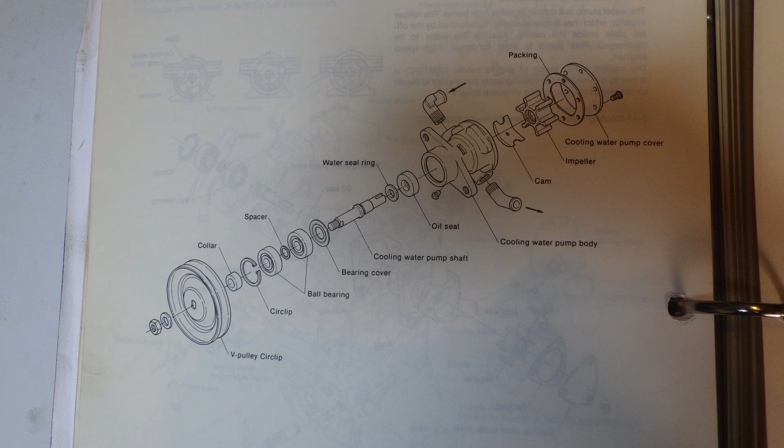Hi and welcome. I'm going to give my raw water pump a quick servicing. I'm doing this because it started leaking in the boat. First thing you need to do is gain some kind of access to your engine. This is my water pump down here, driven from a little fan belt.

Normally if I put my hand underneath it's wet, but at the moment because I haven't used it, it's got salt on it. These two adjuster plate nuts, the lower one and the top one, are what I take off to slide the whole pump and the plate off. This intake hose will have to go, and around the back there's an output hose which will have to go as well, but they can wait for the pump to be removed.

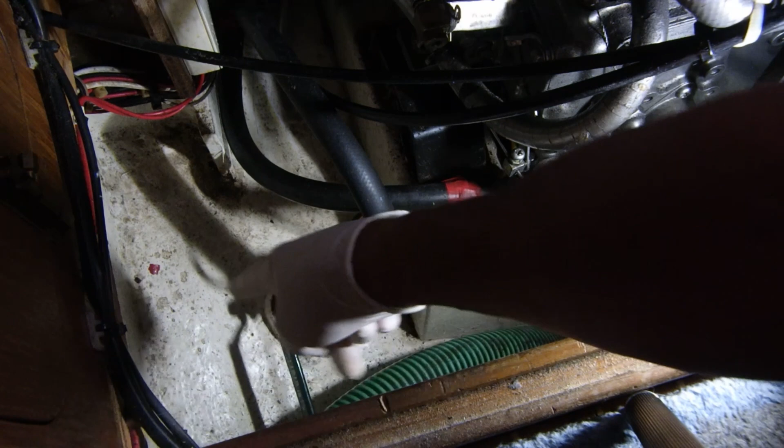If all goes well, a 12mm combination spanner and a flat screwdriver will do the trick. First of all, make sure this seacock's switched off. The handle has to go across the flow, not with the flow. Then get your 12mm spanner and break your two adjuster plate nuts. You're pushing down on these anti-clockwise, standard setup.

It's worthwhile noting these things are quite long. They're about 5 inches, I think, if I can remember. And what you'll find is that you need a bit of area in front of them to be able to withdraw them out. If you haven't got that sort of area, you'll have to take the small 2 bolts off which hold the pump to the adjuster plate instead. You can see the whole pump's loose now.

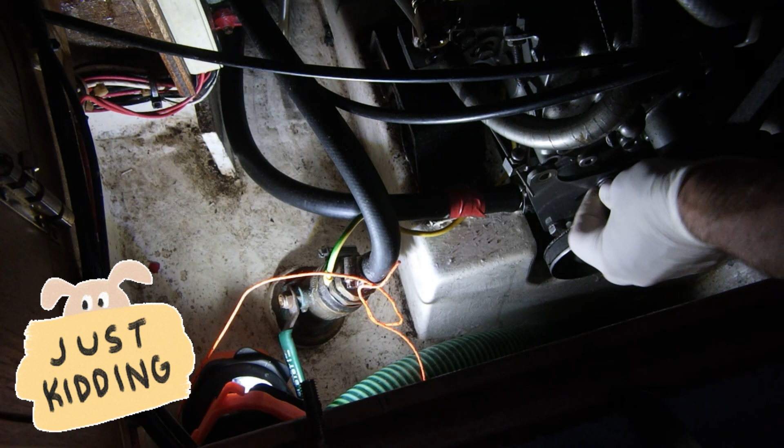When you remove the second one, don't worry. Pump's not going anywhere. It's not going to disappear down the bilge or anything. It's still got 2 hoses on it. Second bolt, just as long as the first. So when you get them out, the only thing more or less holding it in place is the fan belt.

Loop it off the fan belt and the only restriction will be the hoses that were on each end of it. This is the position you'd need to get it to now in order to do just an impeller while en route. The back plate's held on with 4 bolts on this one because it's a speed seal, 1, 2, 3, 4. Next we need to remove the jubilees, this one on the supply and the other one on the output.

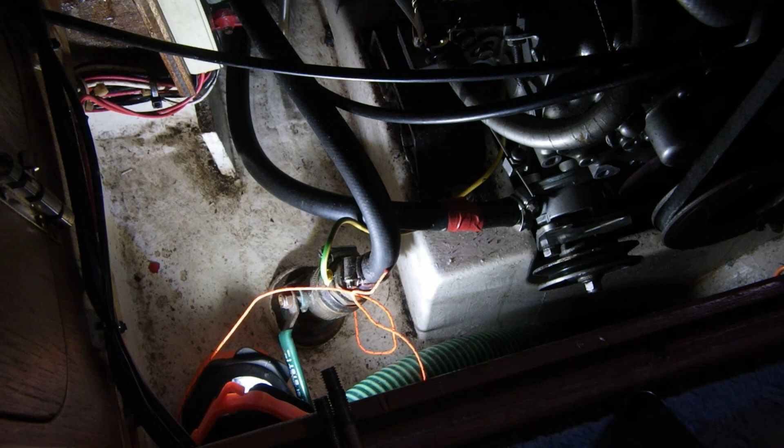I can't access the screw because the adjustment plate's in the way, so I can't get the screwdriver in line. So I'll introduce a 7mm combination spanner, and that can work on the hex and it doesn't need to be in line. It's a bit slower than using a screwdriver on a Jubilee clip, but you can get small ratchet versions of this as well. A little bit of rapid spanner movement.

I've loosened the clip now enough to be able to rotate it a little bit, so that I can hopefully get the screwdriver on it and finish undoing it. Once I get it sufficiently loose, all I'm going to do is slide it down the pipe out the way, so hopefully it doesn't end up on the floor. Down the bilge.

Once I move the clip out the way, I'm going to get a firm grip in one hand of the pump, and a firm grip of the hose in the other hand. And I'm going to try and rotate them, not pull the pipe, but rotate the pipe until I feel it moving. And once I can feel it moving, then I know I can ease it off and let the water drain out the system.

A little tip here, if you feel the pipe tear underneath your hand while you're rotating it, it's the strengthening cords inside the pipe that are breaking, and you really should replace that then. Just let the system drain out into the bilge, there won't be much in it. Now do exactly the same again with the output hose.

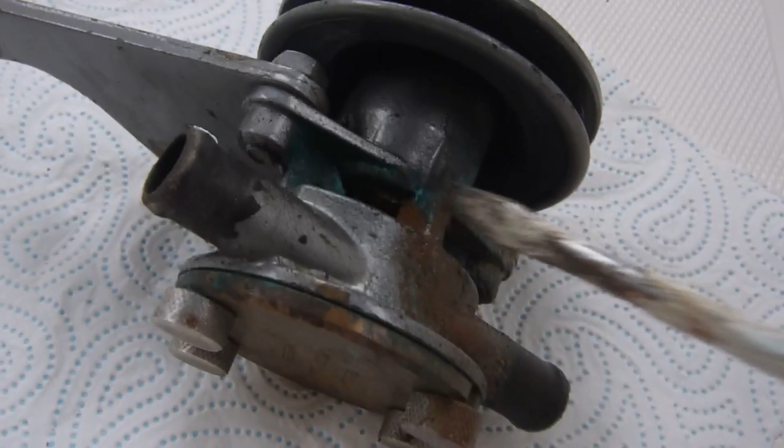Well, I've ended up needing a 12mm, a 7mm and a flat screwdriver up to now. But at least that'll let you get it off the boat and take it home. Now this is the bottom of the pump here. And you can see the tide mark, or the telltale tide mark, where the actual rusty water's been running down the pump. And if you look very closely just in this area here, you can see that rusty line there where the water's been leaking out the pump.

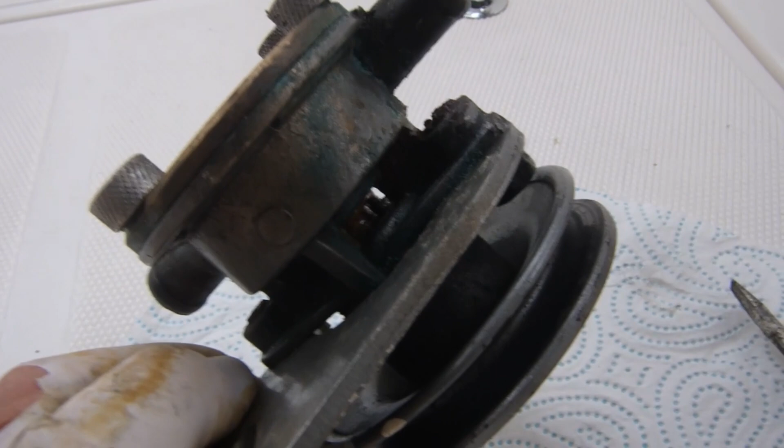Most pumps try and make sure there's a void between the bearings and the impeller, so to protect the bearings. Well, I take the whole thing back to the workshop. You can clearly see where it's been leaking. Time to make a bit of an examination, I think. Right, well, the obvious things are, this is the pulley bearing end, and the other end is the impeller housing end, this end. And you can clearly see the leak's been coming from the void area between.

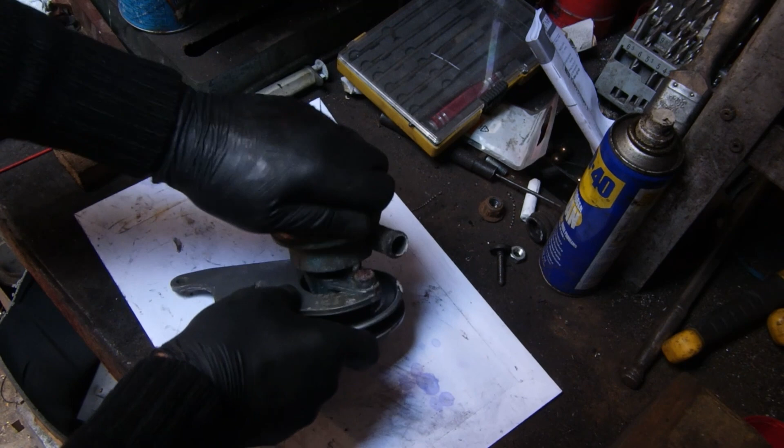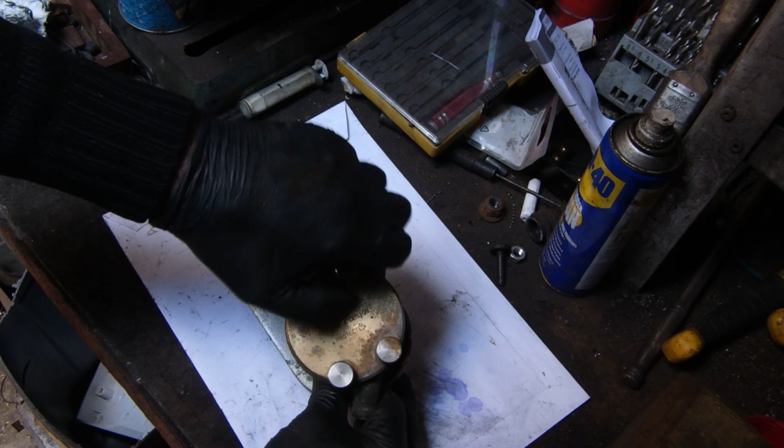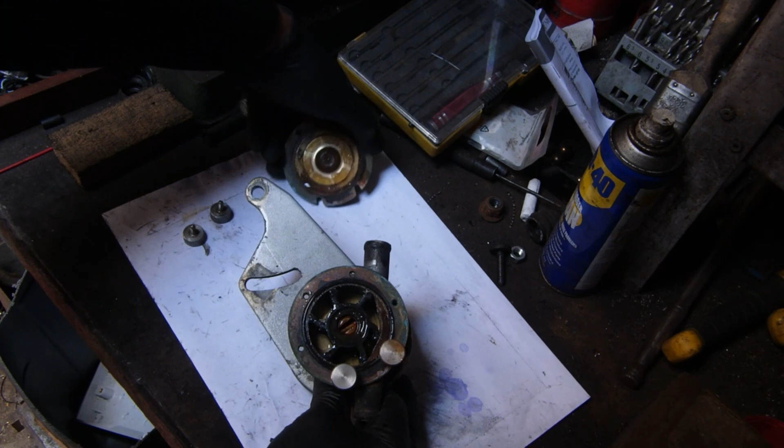These plates normally have 6 screws to undo with a screwdriver, but as you can see on this plate there's just 4 knurled nuts. This is known as a speed seal. You undo 2 of them and take them right out like that. Once you've removed them, the other 2 only need slightly loosening and the plate will slide off like this. This is a bushed plate and has a bush in the centre of it, so be careful not to drop the bush into the bilge if removing while still on the boat.

This piece that runs around the side that looks like a lump is the cam plate. That's the bit that makes the impeller squash so it sucks and pushes water. Now, using a spiked screwdriver with a 90-degree bend on the back of it, you put it to the bottom and you lever up underneath the impeller to bring it out. There are other ways of bringing them out. This is by far the best tool you can use to remove an impeller, and it's also the best tool you can use to remove the seal out of the pump as well.

Should you not have one of these tools, well, there's another method you can use using 2 screwdrivers, one either side, but you're actually putting a little bit of pressure on the working face at the front, so you have to be careful. Have a quick look at the tool I use with the 90-degree bend in it. It's excellent. The method that uses the 2 screwdrivers is quite simple. One goes in one side, one goes the other, and you draw it up together like that until it comes out.

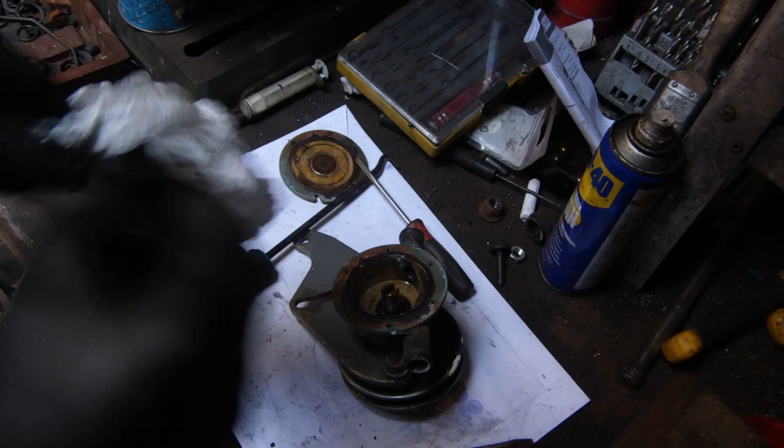I'm just going to have a quick look at the impeller, see if I can see any visual damage on it, like cracks along the vanes, so the vanes could actually detach and come off. Check that the drive bush inside hasn't delaminated. The pump housing around here might have a gasket or an O-ring seal which needs to be checked as well. Most paper gaskets around here will already have ripped at this point and will need replacing.

The advantages of an O-ring are you might get a number of goes out of it. It doesn't really need replacing until it's gone hard. Although for the cost of an O-ring, I'm quite sure you should replace it every single time. My method of fishing an O-ring out is just to get a pair of tweezers and push it a little one way or the other, and it makes a little bump, and I put my fingernail in the bump and I lift it out. That way you've got no chance of scoring or damaging the recess it came out of.

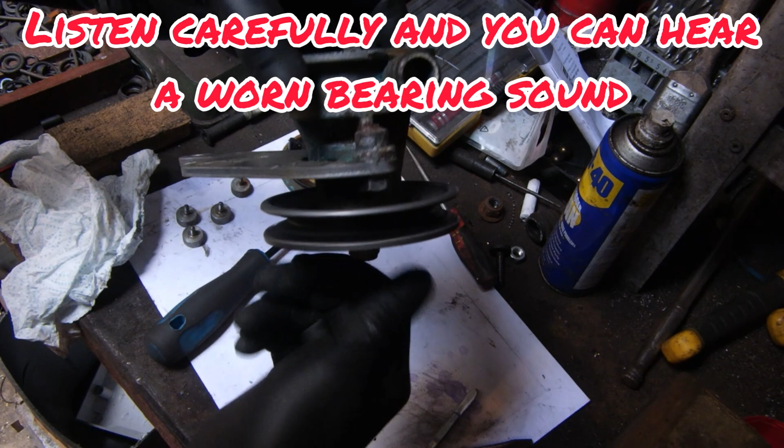This black thing down here is the seal that's meant to keep the water in the wet side of the pump, which has obviously failed because the water's been coming out here. Now I want to check for play, and I'm going to rock the wheel this way, and I can't feel anything, although there was a bearing noise, so I'll turn it 90 degrees and I'll retry the same, rocking it, and then after I've rocked it I'll try pulling and pushing to see if the shaft moves in or out. And it doesn't, it all feels lovely, but there's definitely a funny noise in there somewhere.

If you look inside the pump here, you can see something there. It's a little rubber O-ring. This little O-ring has a really technical job to do. When this shaft spins round, the little O-ring, if it gets a drip on it, uses centrifugal force and flings it out the pump. Ideally, it should be located in the centre of this gap rather than to the side.

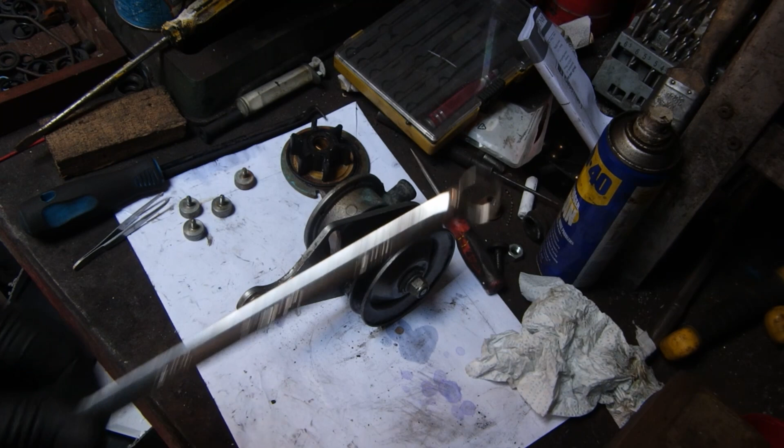The nut that holds the pulley on sort of slips in your hand if you try and use hand force holding the pulley. So what I do is I get a screwdriver and I hold the pulley still and I give the spanner a whack. And it normally frees the nut the first whack or the second whack. There you go, it's gone.

If you don't have a breakdown of all the bits and pieces, put them in an order when you take them off, like nut, and then washer, and then pulley, and then washer, and so on. You're now left with a bearing retaining nut and a circlip to deal with. The circlip that holds the bearings in place has got two little eyes in it. The two little eyes are one there and you squeeze them together with the grips to loosen the clip.

On the other side we've still got our offending item, the seal, and I'll show you how to get him out dead easy with my funny screwdriver. You stick him in the hole there and you just rotate it 90 degrees and you go round the pump giving it a little twist in each hole, and it pushes up on one side of the pump and the other side it shoves against the seal until all of a sudden the thing just pops up on the other side. So you can see the seal itself there.

You can even get a grip on it on this side once it's up sufficiently. Work it a little bit and it'll soon be clear enough for you to get hold of with your fingers, and then just pull it out. If it's a really old seal, the rubber will have dried and hardened and maybe even cracked. If you just push the inside with the screwdriver, it'll show you if it's still flexible or not. Well, this one's still flexible.

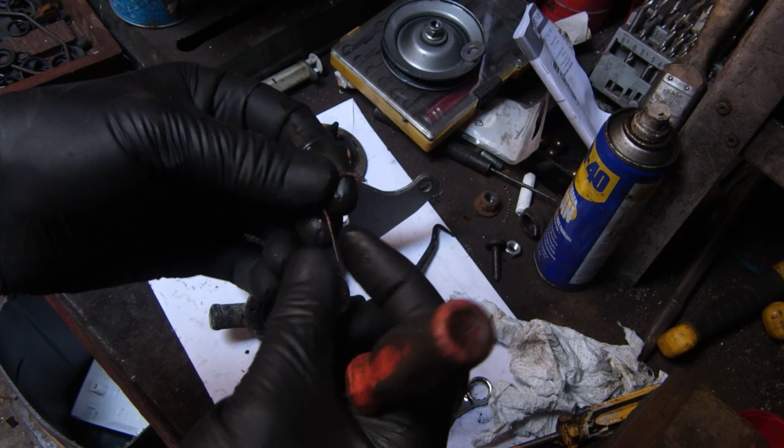Just under the lip there, there's a spring. The spring keeps the tension on the seal itself. It's easy enough to get the spring out. If you're careful, you can see if it were broken or not. Well, this one's not broken, but it's very rusty and it's lost its spring, and that doesn't help things. If I just give it a gentle tug, look for the weak link. I'm sure there's going to be one. There it is. It'll just fall apart on a rusty section, and there's no strength or spring in it. As you pull it, it just stays pulled or snaps.

Well, to be honest, although it looks worn, it doesn't look like the worst seal I've ever seen. So I'll just clean it up, check the numbers on it, and then give it a measure. You can use the numbers on it to order another one if you haven't already done so beforehand by using the model of your engine and your pump.

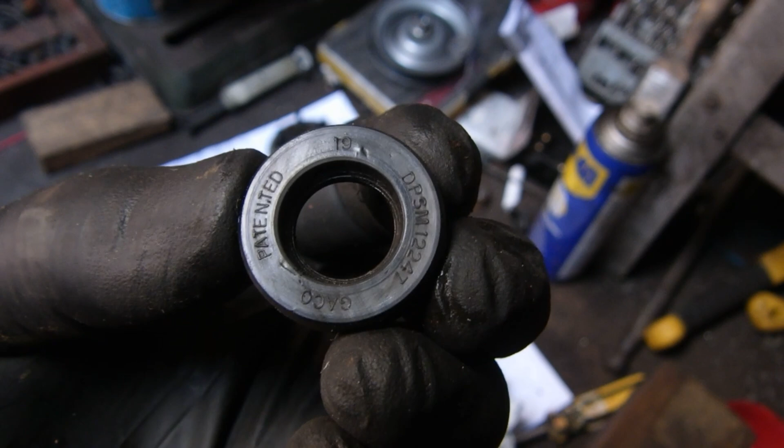There's quite a bit of a salty, rusty mess in the back of mine, so I'm just going to clean out the back bit. You can wash it out with a bit of spray or something like that. In this area here, the void, mine's got chunky, crusty, rusty bits in. And then I think I'll dig out that O-ring that's hiding in there. The O-ring, don't forget, is the little bit that chucks the water away when the pump's spinning round so that it doesn't run down to the bearing.

Here's the O-ring. Nothing special, just a circle of rubber. The O-ring's real job is to buy you time once the seal's failed, so it doesn't get the bearings straight away, so that you've got a little bit of time to notice. This little devil looks after you and gives you quite a few extra hours. Very mucky in there. I'm surprised this pump still goes round.

Next we need to remove the circlip. Put the pliers in the two little eyes, squeeze together, and with your fingers keeping hold of it, lift it off. Then put it with your other bits nice.

Right, we need to take the bearing retaining nut off next, so you'll need a big spanner for that, a 19-ish on a ring, and you need an open ender to stick on the shaft itself to lock the shaft, so you can take the nut off. Now this is special, this. What looks weird in what I'm doing now?

Give yourself a pat on the back if you spotted what was weird about that. Well, it was quite simply weird because it's a left-hand thread. That means it goes the opposite way than an ordinary nut. And if you look on it, that up the top there is telling you left-hand thread.

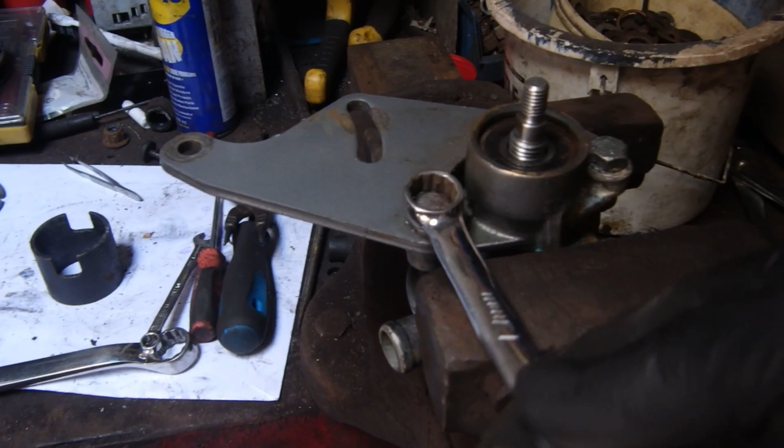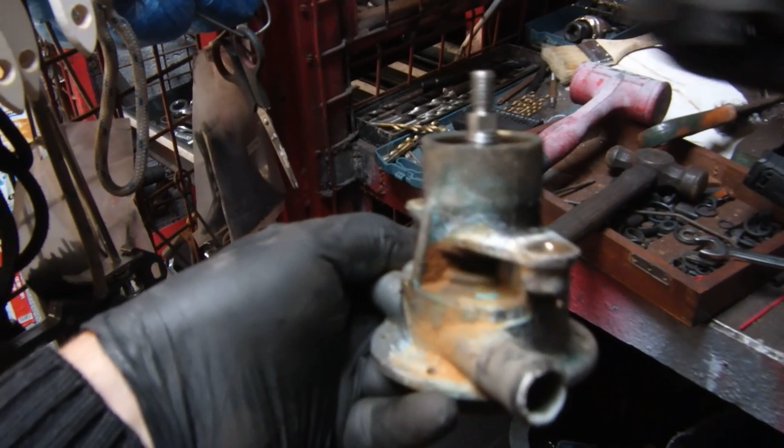Next, I normally take off the mounting plate. It just makes the pump easier to handle, and it's a doddle to take off, just two quick nuts. Some of you might have even left the mounting plate on the engine. In order to push the shaft out correctly, you should put the load down to the working flange, but you need special tools to do things like this, and we don't all have them. So there are other ways of doing it.

You could A, make one, or B, go to the toolbox and find yourself a suitable socket, and the socket itself can sit on the face ring. Bit dangerous for your face ring, but it can sit there anyway and you can push into that. Any good fitting tube that goes along the bottom there and the bearing can slip into it will do fine though. Once you've found a suitable socket that the bearing will slip into, take it then to the press.

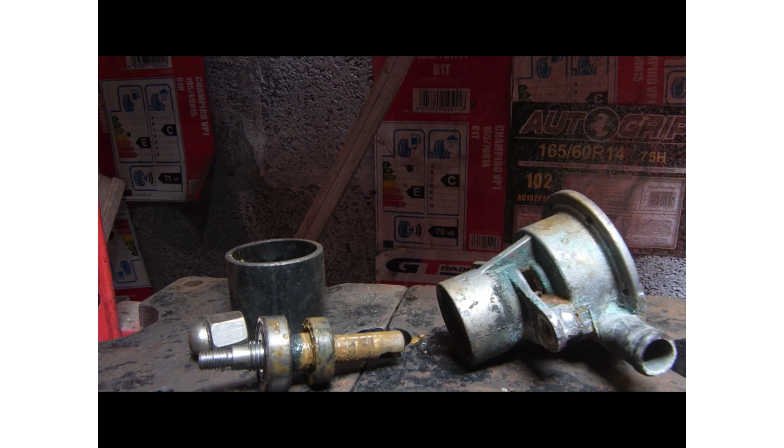Put it on the press and you're going to shove it out into the socket. The press will end up pushing it down about 15 millimeters before it drops into the socket. And as soon as it drops into the socket, stop pushing. If you feel any pressure doing this, stop, but otherwise, there she goes. Well, it doesn't look very nice in there. Bit of a rusty looking shaft, so I'll pull the bearings off and see what we've got.

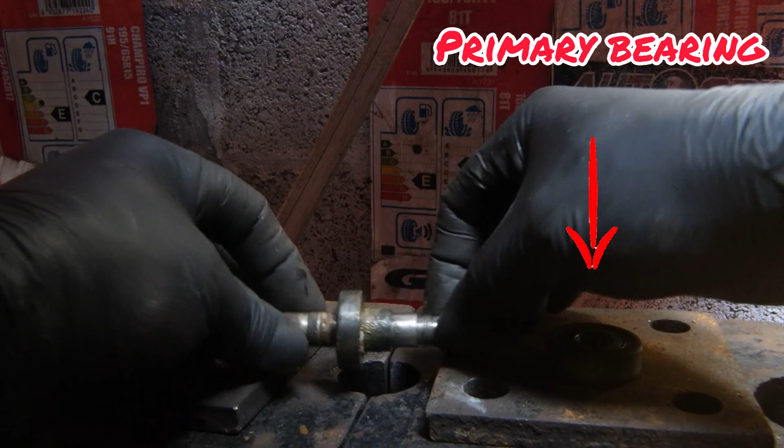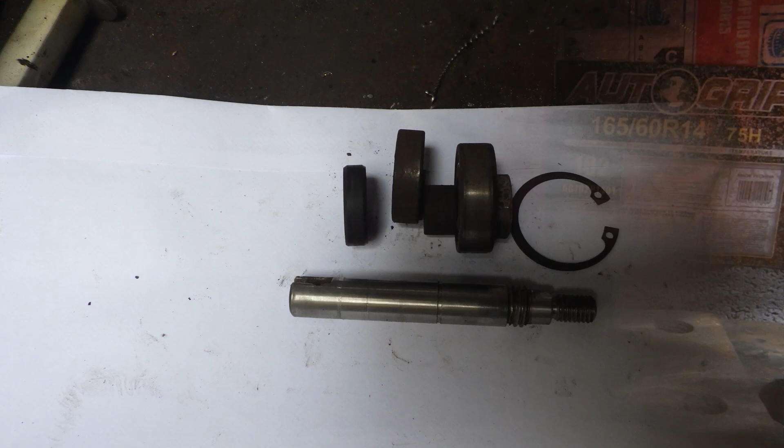After removing the primary bearing off the shaft, we're left with the shaft with the small bearing on it, followed by a little circlip, and then the sleeve which is on top, which is a spacer, which controls the distance that the primary bearing can slide down the shaft. This is the order the bits come off: seal, small bearing, circlip, spacer, big bearing, nut, big circlip. There they are spread out. The shaft wasn't that clean. I've given it a clean with some 1200 wet and dry.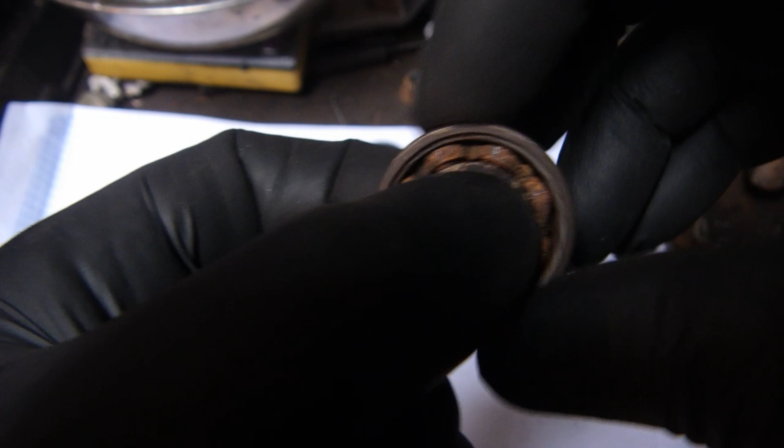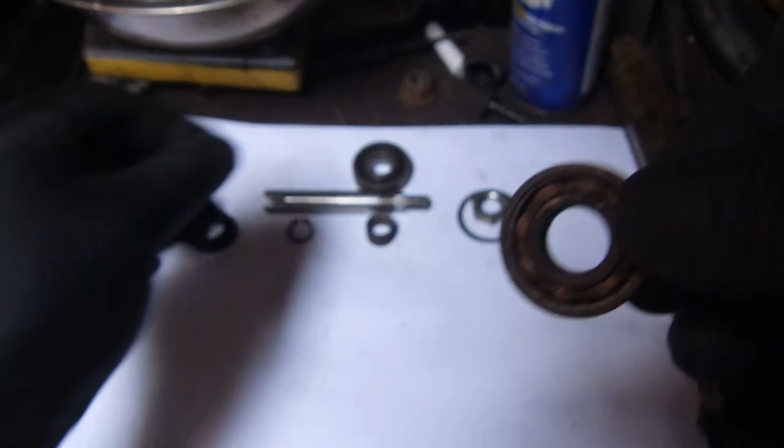This is the state of my little bearing. I've pulled the rubber side off it with a little screwdriver and found that the actual bearings are seized to the inner bearing race. The outside one will move, but there's a millimetre or so of play in it. So it's probably been floating around and missing it most of the time. When I poke the shaft in on the end of the bearing, I can see the inside movement, and it's quite considerable. And I think this has been the responsible item for the seal being under load and allowing water to get out. What a mess.

Alright, let's have a quick look what this O-ring does. All it does, it just gets shoved down on the shaft, and it's got no particular place. It's where you're going to leave it, it's going to stay. But when it's working and it's spinning round, there's these little plastic tangs that stick out here and here and here. And what they do is when there's a drip on the O-ring, the drip touches one of them and it flicks out the side.

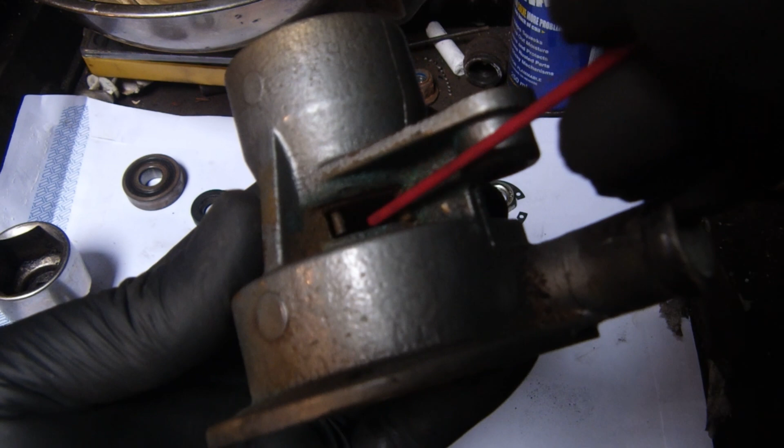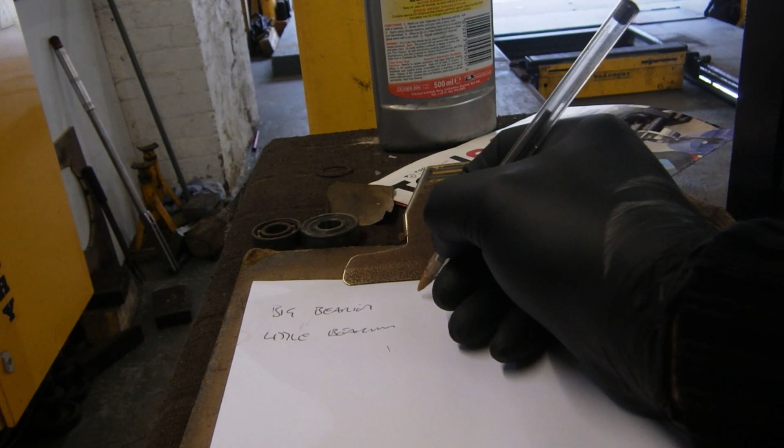Dead simple system. I used a 6-sided 32mm socket to push the bearings out into, and as you can see, it fits perfect. That's what you need to know to use the socket, that they will fit into that area you're pushing it into. With the bearings out, it's quite straightforward. You just start measuring them up and recording the data you get.

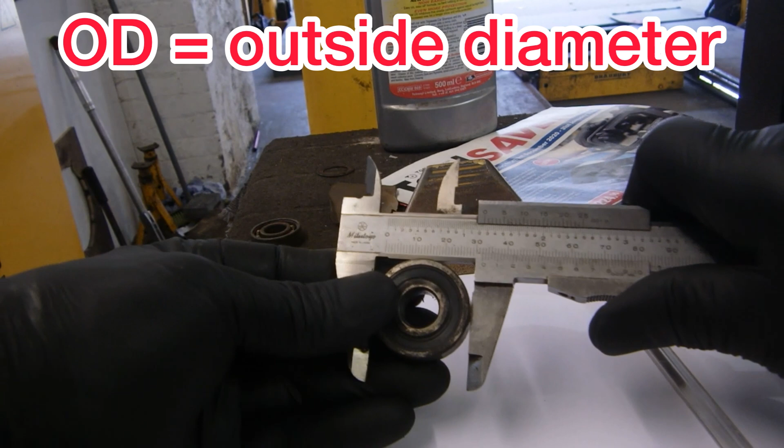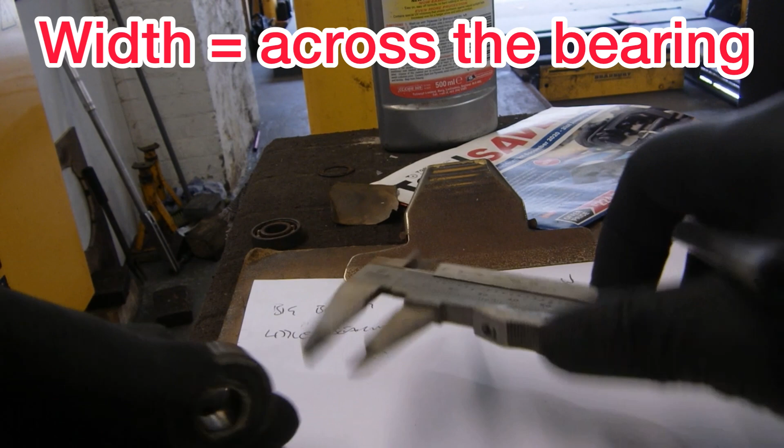The outside diameter is the outside of a bearing, so you read it, and once you're happy with it, you write it down. They're normally in whole millimetres on most bearings. Inside diameter is obvious, it's the inside of the bearing, and the width is just across the bearing. That's the specification for a bearing, and then do that again on the smaller bearing. Record your width.

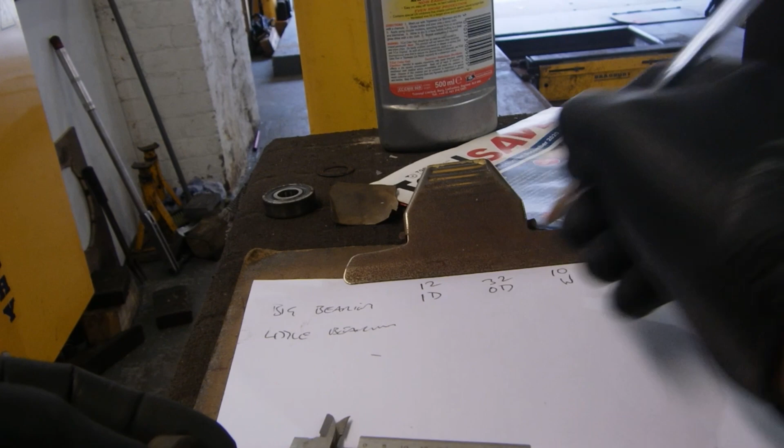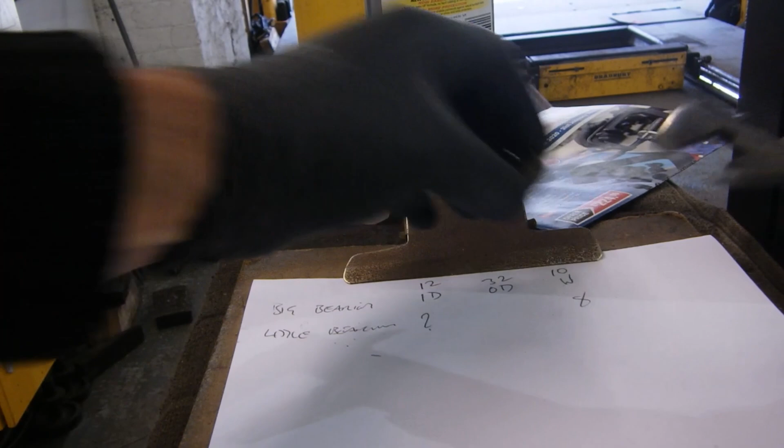Inside diameter, if it's a bit rusty in there, it mightn't be true, and the shaft itself will give you a better inside diameter than that. So due to the rust, I'm not happy there, so all I'll do is I'll put a question mark down for now. But I guess it's exactly the same as the big bearing, which I was happy with, which is 12mm. And then again the outside diameter, which is quite easy to read.

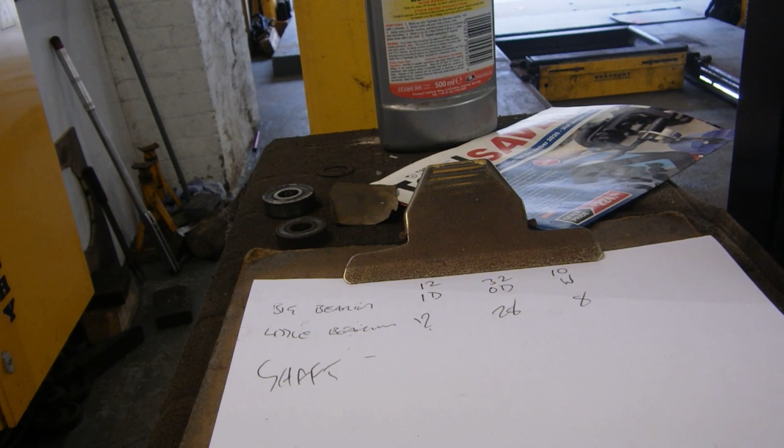Now you can double check these by taking the inside diameter of the pump where the bearings sit, but the shaft gives you the inside diameter of the bearings themselves. I've cleaned the shaft up with wet and dry and 1200 paper.

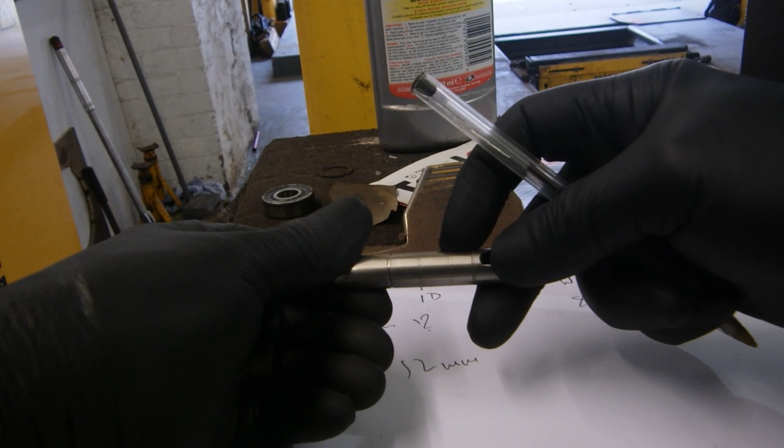And when I measure the shaft, it's 12, so the inside of the bearings therefore have to be 12. There's a very small line worn into the shaft from the old seal. I don't think it's going to make much of a difference, but you can just about feel it with your thumbnail or your fingernail. The small circlip fits just here to control linear location of the shaft. I try with the vernier to see if there's a noticeable difference that could be measured for where the little tiny lip mark is, but it can't be measured.

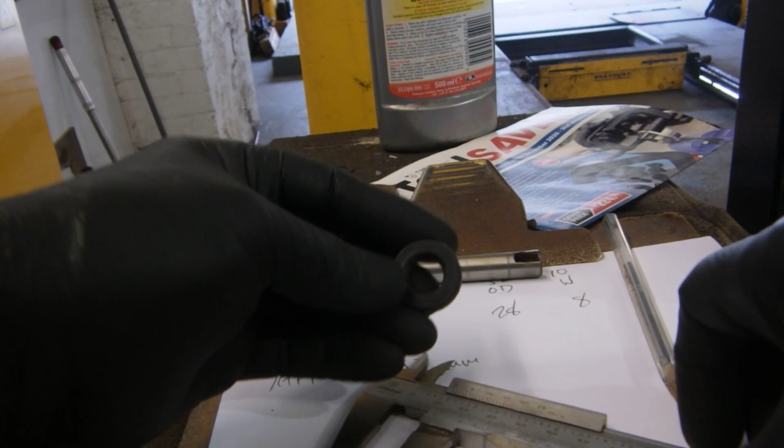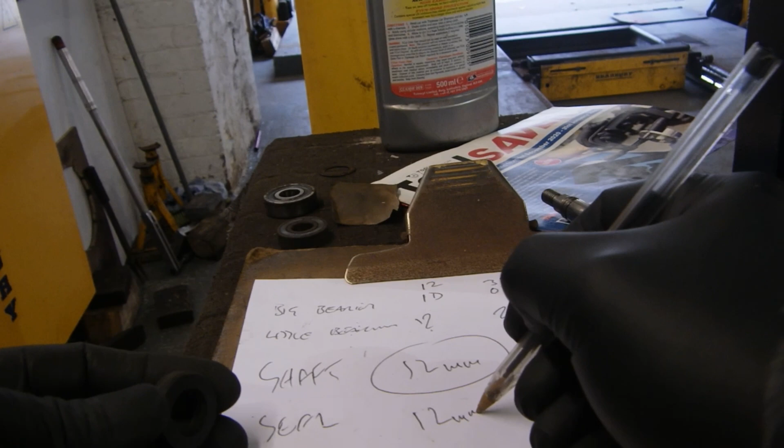The only thing left to measure now is the seal. So I'm going to measure the outside diameter of the seal, and I can check that against where it fits in the pump if I have to. And then I need to measure the width of the seal. So it's 24 on the outside, and then measuring the width of the seal. There's no sense in measuring the inside diameter of the seal because it's spongy. But we know the outside diameter of the shaft's 12 millimeters, so the inside of the seal has to be a 12 millimeter seal. I tried the seal on the shaft to see if it still fits with a bit of tension, and even without the spring it feels like it has a good fit.

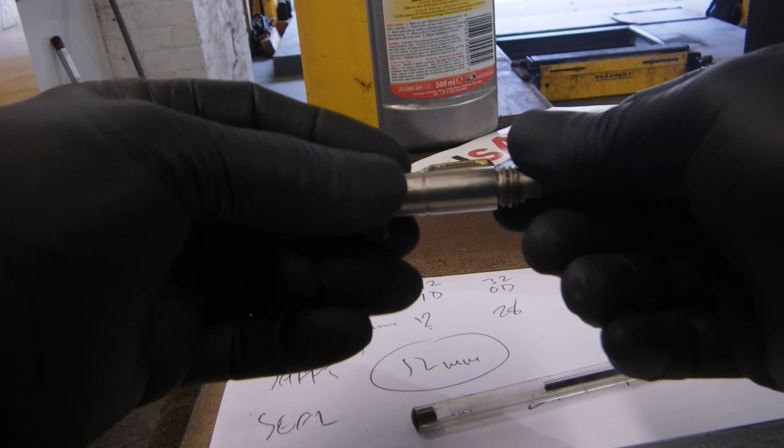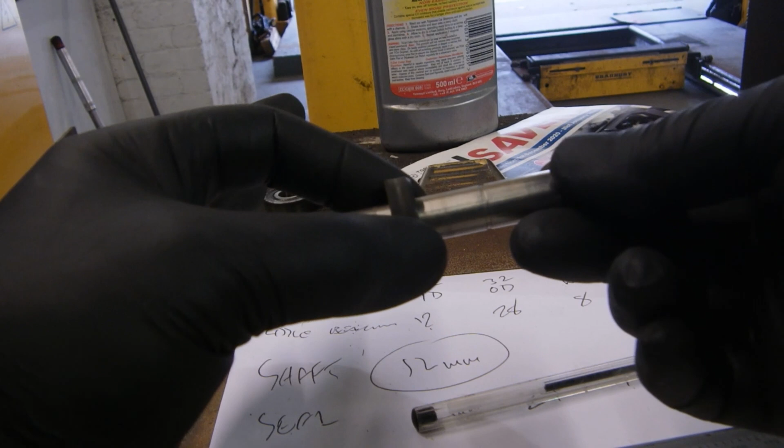So I think the major cause of this leak was the second bearing failing, resulting in the shaft not remaining true and putting pressure on the sides of the seal.

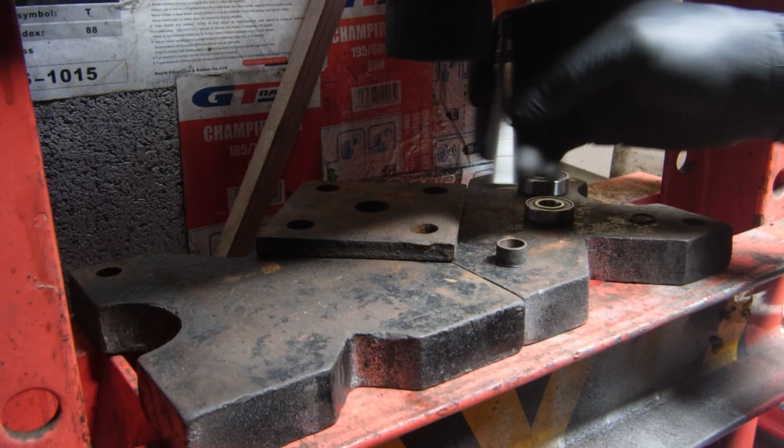Right, let's get it all together. First thing you need to make sure is the plate we're going to push with, the shaft will fit through it clearly, but the inside of the bearing can't fit through the hole. That hole needs to support the inside of the bearing, which is that part there, and this one does. But what I'm saying is when we put this bearing on this plate here, when we press on the inside of it with the shaft, the load is transferred on the inside and not the outside of the bearing, if that makes any sense.

Next, with everything cleaned, the first thing I do is get a bit of grease and put it on the shaft. I just like to think that I don't want anything to pick up while it's being pushed along. So grease the shaft and stick it in place. I'm going to use the flat end of this shaft, which is the shaft that drives the impeller, to push it by rather than the thread at this particular point. I need to push this shaft that far down that the groove for the circlip appears on the other side of the bearing. You can see the groove just about to disappear into the bearing now.

Now you don't need to go miles past this, so I don't. I normally stop and have a look where I am and see if I've gone far enough, because at this point, once you've passed where you need to go and you put the circlip on, you're going to have to push it back using the threaded end, which is the bit I don't like. Well, it hasn't shown its face yet, so we're going to have to push it a little bit further. Right, so back into its place. And again, bring it down and shove it to an estimated guess to hopefully get the circlip groove out the other side of the bearing.

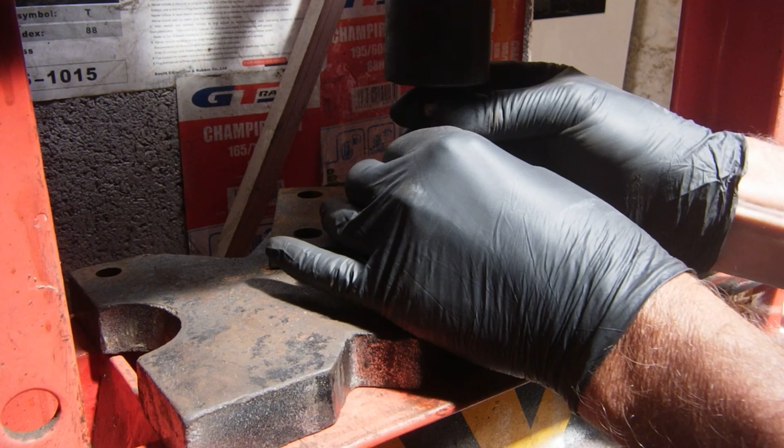This next bit is the bit that always goes against my grain. It's pushing on the thread. I hate pushing on the thread. So I take an ordinary nut and I stick it on the end of the thread till it's about level with the head, so that the load is passed from both sides and hopefully the thread doesn't squash.

And we just bring the press back into play, and we're going to allow it to rest on the nut on the top of the thread while it pushes the shaft down into the bearing, and hopefully we'll stop as soon as we feel like there's a little bit of tension of the circlip touching the bearing. Right, up to now we've made sure that we've put no load whatsoever on those bearings in that new race, and everything feels lovely. Ready for the next stage.

So we're going to take this nut off, our sacrificial nut at this particular point in time, and this sleeve needs to go on. But before he goes on, our spacer sleeve, we're going to grease it up so that it's nice under there and hopefully Mr. Rust's held back. And then it's sleeve on, and then we're ready to go back into the press. Okay, a little bit more grease.

Get our new big bearing or primary bearing and drop the primary bearing on. Now it's going to be on the same hole, so it's going to be putting its pressure on the inside race rather than the outside race of the bearing. Let's bring the press back into play and let's shove that along until it just touches the spacer between.

If you get to know your press, you normally feel the resistance change, and that's the particular point to stop rather than overdoing anything. Check everything looks and feels good at this particular point in time, that nothing's been damaged in the process of putting it together and everything runs smoothly.

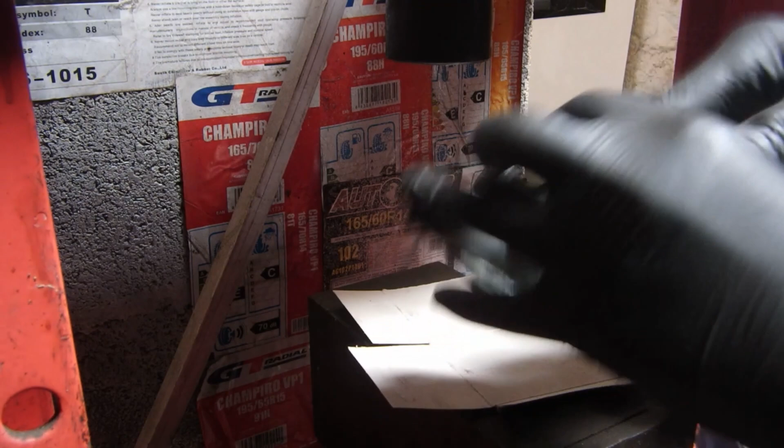Next I get the pump housing, give it a final clean, and I put it down on a piece of cardboard, the cardboard to protect the working face there. You know what I'm going to do to it next. I'm going to get a finger full of grease and fill it up. Going to make sure all these areas inside there are well lubed.

Now I always choose to fit my shaft and bearings as one piece, like a cassette if you like, and that actually flies in the face of the correct way of doing things. So you may wish to adopt a different procedure. Mine may be made up of a bit of laziness, but a bit of convenience. But also, I've been doing it like this for years and it seems to work. I'll tell you what I'm doing wrong and then I'll explain why.

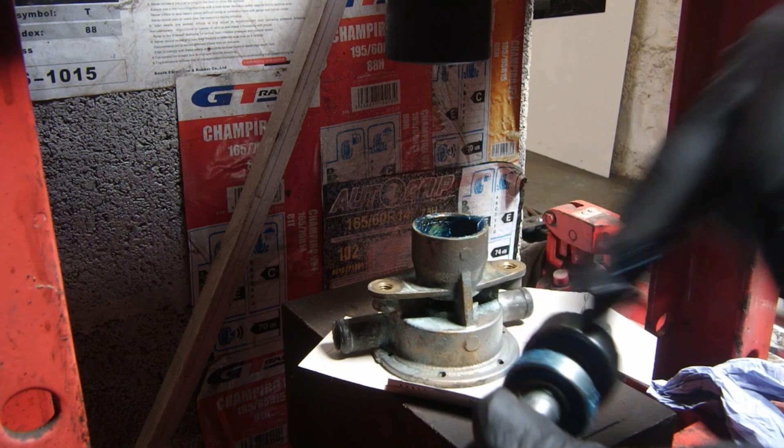Firstly, I locate my little cassette shaft that I've put together with bearings and shaft into place and ready for pushing in. In order for me to push this shaft in, the outside of this bearing is the area where I need to apply the effort, but I don't. I apply it on the inside using a socket that fits over it and fits on the centre section of the bearing, just there. This method to me is best.

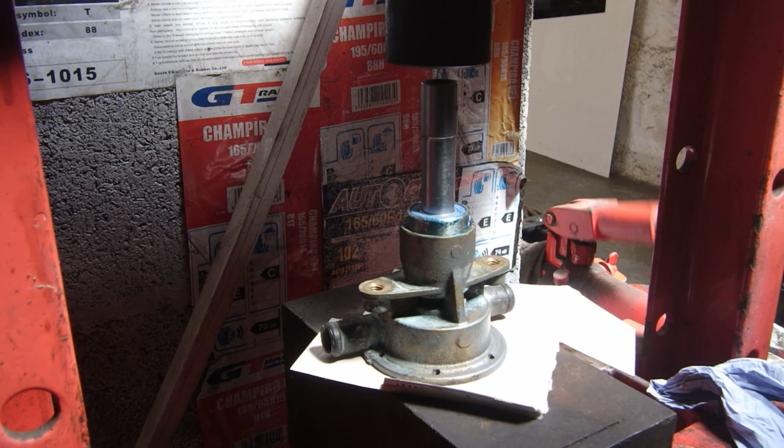Both bearings as they're pushed into place will have some load on the actual balls, which you want to avoid most of the time at all costs. But even if I push this one in from the outside at the top, it would still transfer pressure to the balls via the shaft and the bottom bearing being pushed into place using the balls. So it seems like six of one, half a dozen of the other, and this is just convenient, so I go for this method.

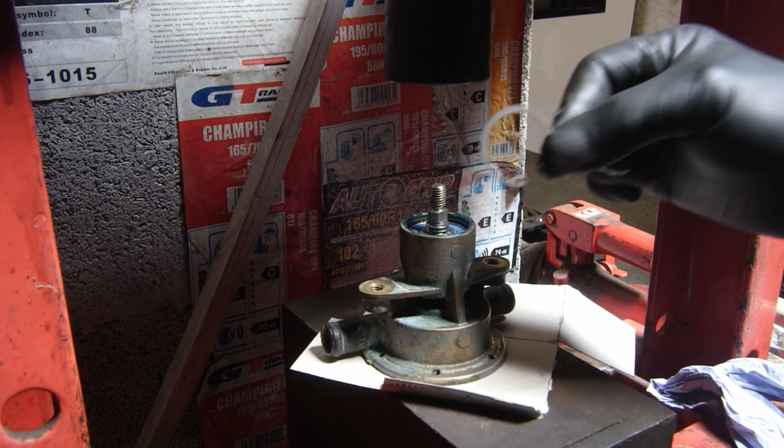Again, I stop as soon as I feel resistance. Circlip next to keep it all together. I use a pair of 90-degree circlip pliers because it's easier doing things from the side.

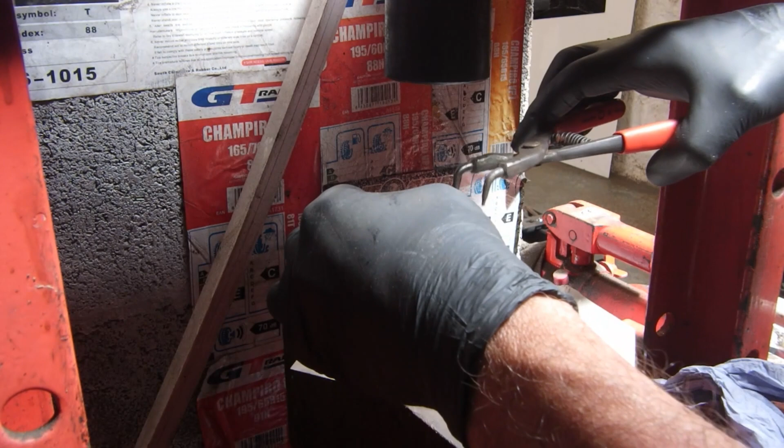And I always tell anyone who's doing a circlip, keep a finger or a thumb on it while you're squeezing it together, because they can go pinging and disappear across the room, never to be seen again. And then just push it down and you'll hear it go snap into place. Give it a twist and make sure everything feels nice.

While I think on, let me show you the tool I use to do all this work, my bent screwdriver. It's actually designed like that, and I don't know what it's called, but I'm sure you can get them at any automotive tool shop. Okay, back to the pump.

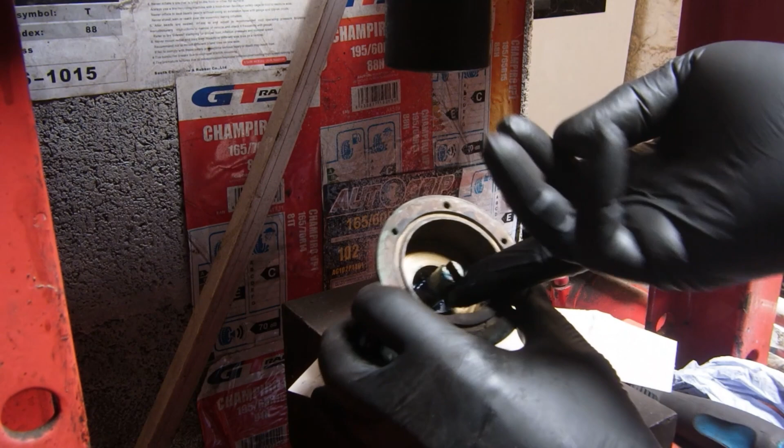What's next? That's right, we've got a little diddy O-ring to stick in there, haven't we? You know now just how important that little O-ring is, and I find when a lot of people do this job, it's the one thing they forget to put back. So again, I grease the shaft, I get the O-ring and I just slide them down, and I'm not bothered about too much grease being anywhere, because normally it'll just flick off around the pump and it's not going to be that much grease at the end of the day.

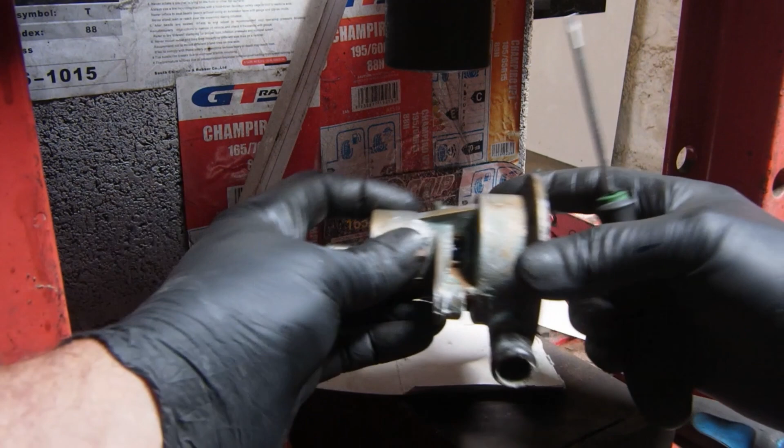Don't forget, we're not just shoving the O-ring in and leaving it. Using the little voids in the side, you can see where the O-ring is, so with a screwdriver, push him down and you want him right in the middle of that window. 50-50 as you look at him either side, and he's in the most precise place he can be then. Just turn the shaft a little, prod him down a little until you've got him all right, and if you think you've gone too far, you can shove him back.

Next job's to fit the seal. The spring's going to be inside with the wet side, which doesn't sort of make sense, but that's the way a seal works. So I completely pack that side of it with grease so that no water's going to be touching that spring for a long time. That grease is going to be there for years. So no corrosion, hopefully, for a long time for that little spring. Right, get him ready, completely cover him in grease, and then, obviously, he's going on the shaft.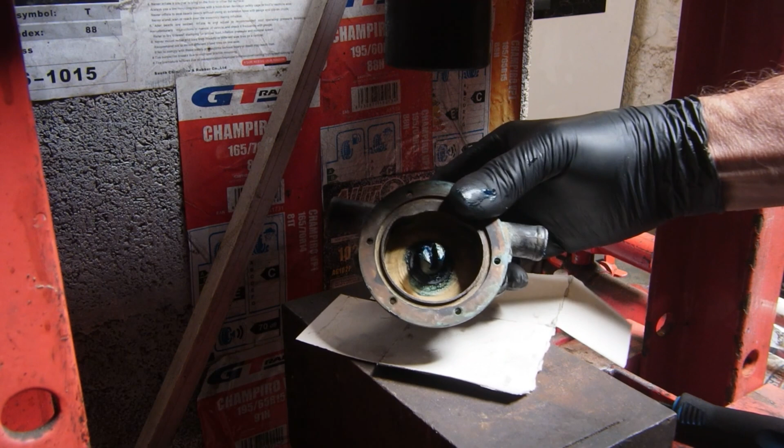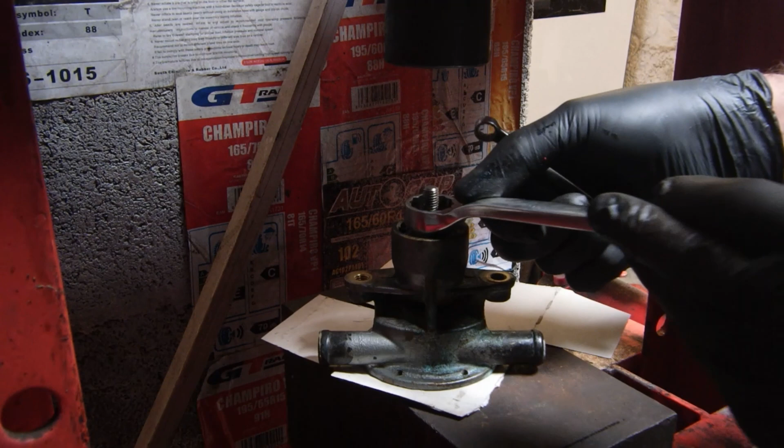Next thing to go on is our retaining nut for the bearings. Not forgetting he's a funny Fred, he's left-handed. So it looks a little bit weird when you're putting him on, but there you go. And to tighten him up, you're only going to nip him into place with the big ring spanner and the little open-ender. The very fact that you've got to tighten it up using an 8mm open-ender is going to restrict the amount of load you can get on. And the one thing you don't want to do is be rounding that at the top.

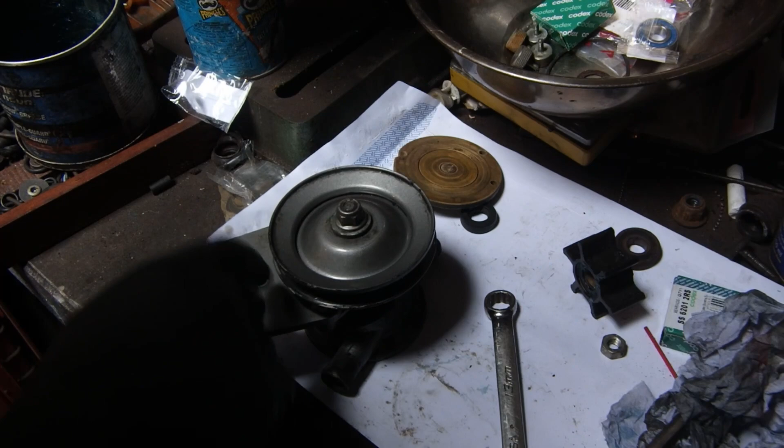Next, the flat washer goes on, followed by the pulley. Locate the drive, then the next washer, little bit of grease on the thread, and then we stick our Nyloc nut on. Then grab hold of the pulley itself and spin the nut down. Yeah, but forgot the mounting bracket. I had to take the pulley off and back on again. Tightening up this nut here, I put a fan belt round and I get a big pair of grips and I grip the fan belt so as not to be anywhere near the pulley, and then I nip the nut up. A simple way of doing it.

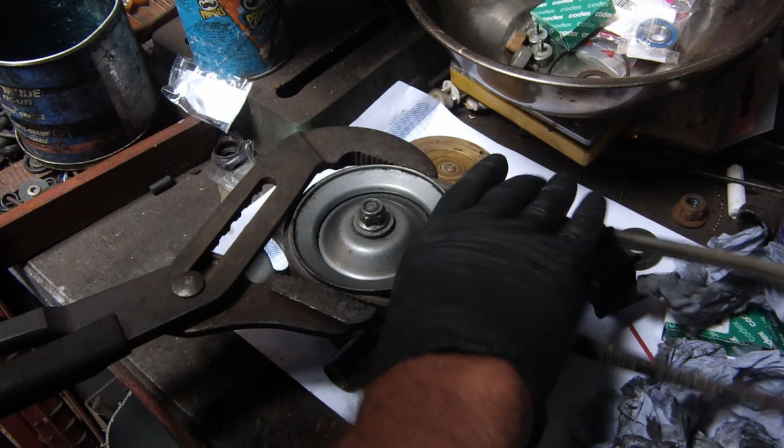Alright, we're going to stick an impeller in it next. So check it's all still lovely and free. Turn it round, and this area here obviously has to be clean, and it's going to be greased. This stuff I use doesn't attack rubber at all. It's a blue grease made by Johnson and Evinrude, and it's fantastic stuff, and I've used it for 30 years. It's the dogs. So I grease everything up that's going to go in here now.

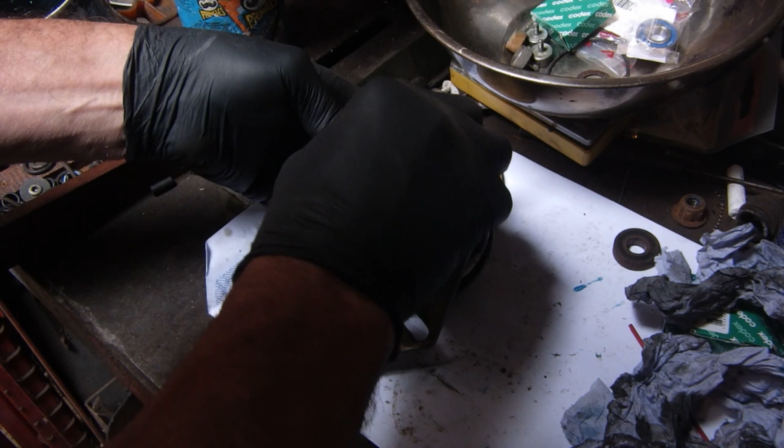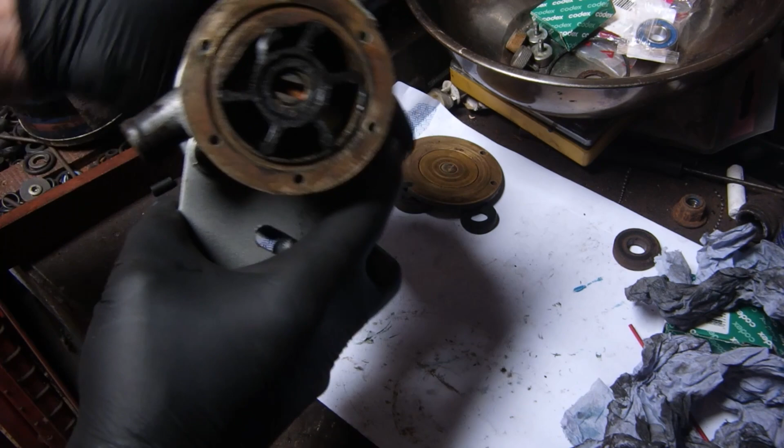The impeller rotates anti-clockwise, so that's the way I'm going to stick it back in. If you're using a second-hand one, it goes back in the rotation that it came out, normally. My method's just to bend the one vane up that is on the cam area and then push it in. Normally your thumb presses enough to push it in then. Oh, you've greased everything, you see. Check it's all working nicely.

If I'm using the old O-ring, the first thing I do is clean it. I clean it by running it round through my fingers to make sure there's no crusty bits of salt on it anywhere or corrosion. And if it still feels like a good O-ring, then I'll reuse it. But before I reuse it, I'll grease it. Grease does two things here. It helps seal, and it also helps it stick in place when you put it in the ring, so that if you've got to service or access it at any point, the O-ring don't drop off and jump in the bilge on you.

And then after the O-ring's in, and I can feel it's nice and proud, because you need a proud O-ring to actually be a seal, then I'm happy with it. So the next thing is the plate. A little dab of bearing grease there on the white bearing. Drop the centre plate back in. Make sure it all feels smooth and no grittiness behind it. And again, I'm going to put the grease on.

It's going back on. And because this one's a speed seal, and it's basically going to slide on going downwards onto the bottom two bolts, we need to put the bottom two knurled nuts in first. So we stick them in with our fingers to get ready for the plate. A little bit of grease on them, a little bit of grease on the next one. Stick them both into place. Then the plate should just drop down onto them.

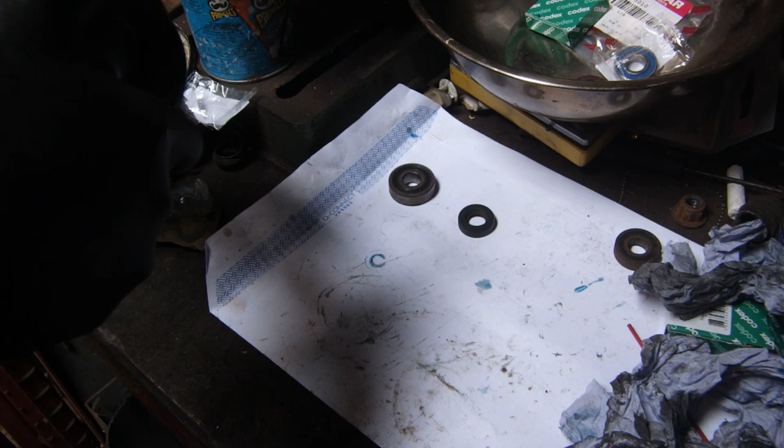Then grease up the last two threads on the last two knurled nuts. Stick them into place. And then when they're all in, tighten them down. Don't forget you tighten them diagonally. And because of my greasy fingers, I finally tighten with a rag. Now spin it clockwise, make sure it's all beautiful and it's ready to go back on the boat.

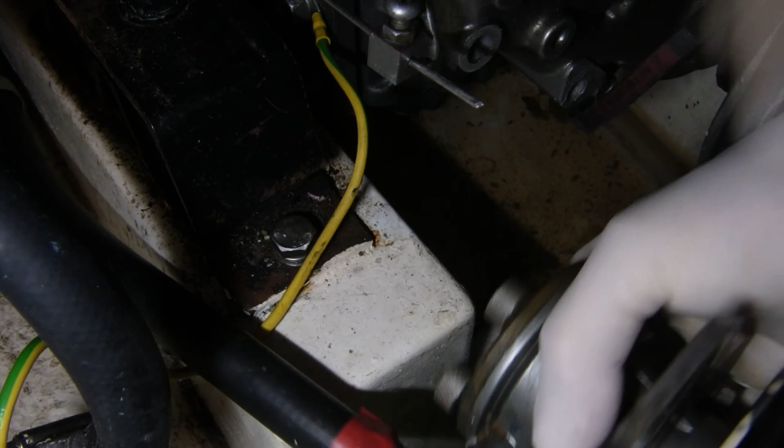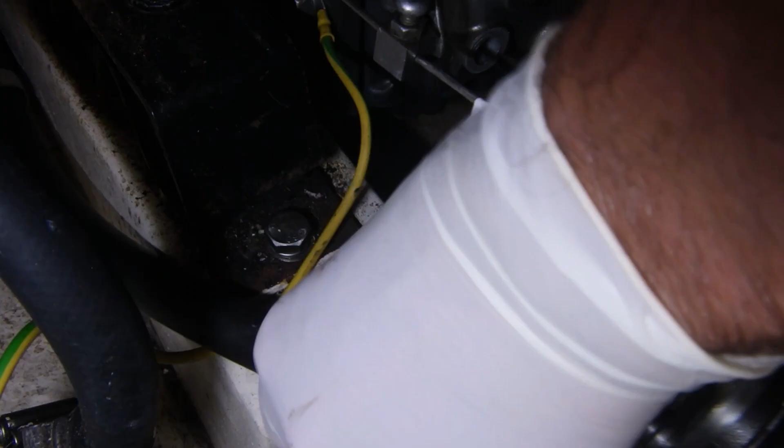All you have to do is refit it back in the boat in the reverse order that you took it off. Check the hoses, make sure they're all right on the ends. Make sure your Jubilee clips are actually on the hoses. Get the pump and fit the output hose to it. Tighten up the clips, fit the input hose to it, bring the clips down, tighten up the clips. When the clips are all in place, then you can put the pump in place.

The first thing you want to do is hook on the fan belt, and then you need to stick the two long retaining bolts into place, and just with finger pressure on the bottom of the pump, tighten the two bolts up evenly.

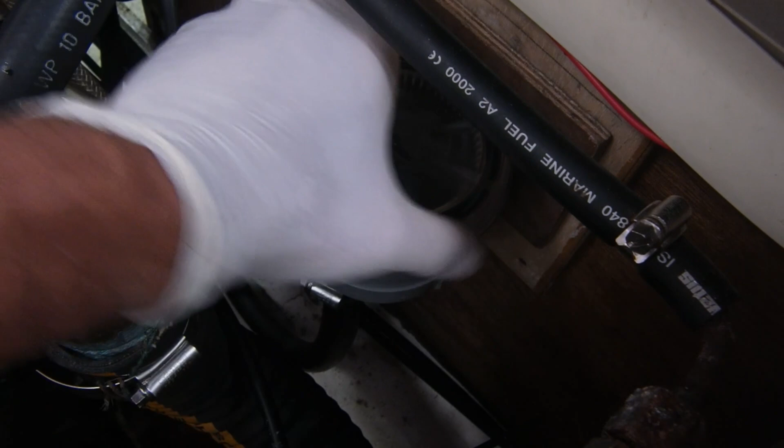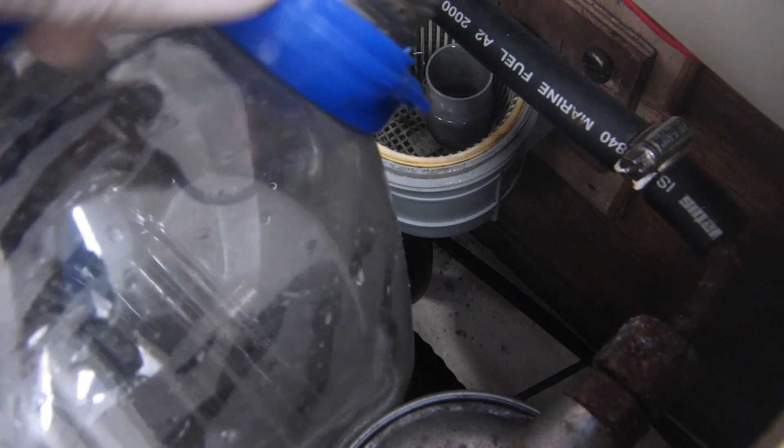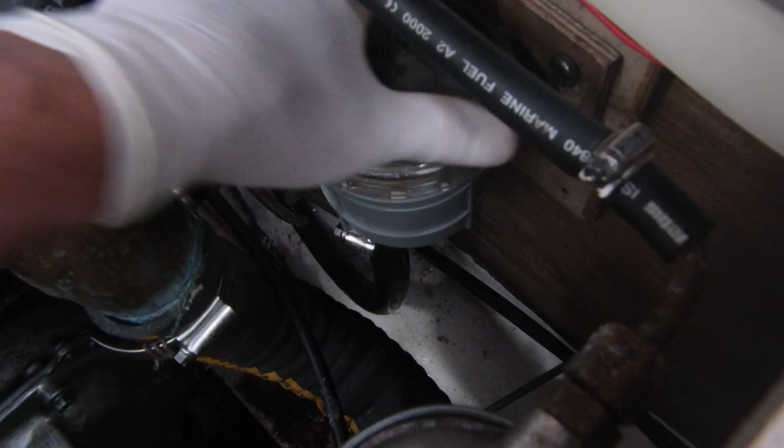And mine's fitted with a high level filter, so I have to take the top off that and prime the system. So with the seacock still closed, I'll fill this up with water, so there's water down the pipe to prime the pump. You just fill the whole cup up till it overflows. It's that simple. And then just refit the lid on top. Now you can open the seacock. And then we can give it a go and see if the engine starts.

There you can see straight away the engine starting and the water's flowing through the filter system, so you know the pump's doing something. Then I'm going to nip outside and have a look at the exhaust, and I'm going to say to myself, there's enough water coming out or there's not enough water coming out, but I'm going to watch it for a couple of minutes.

After I've run it for 10 minutes or so, I'll be going back inside, switching it off and checking that there's no loss at the pump. I've got no drips, no leaks, and I'll keep my eye on it for a couple of weeks till I get used to it and think it's a successful job. I hope this gives some of you the confidence to crack on and sort your own water pump problems out.